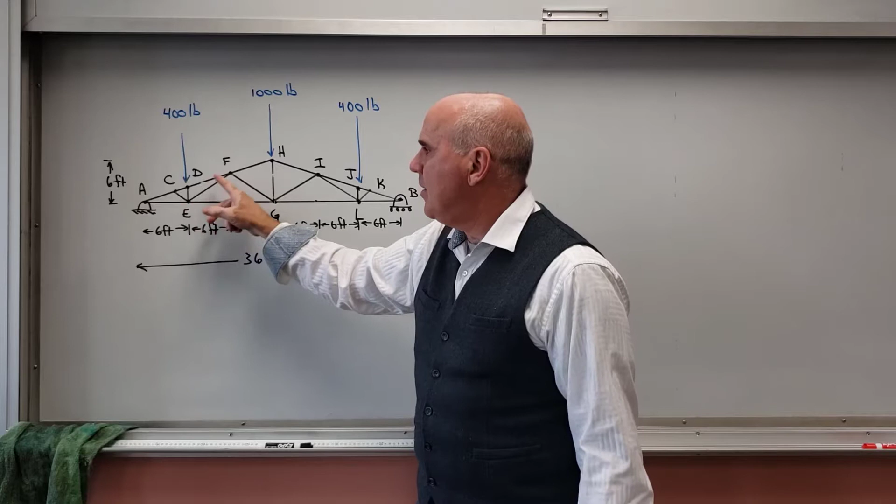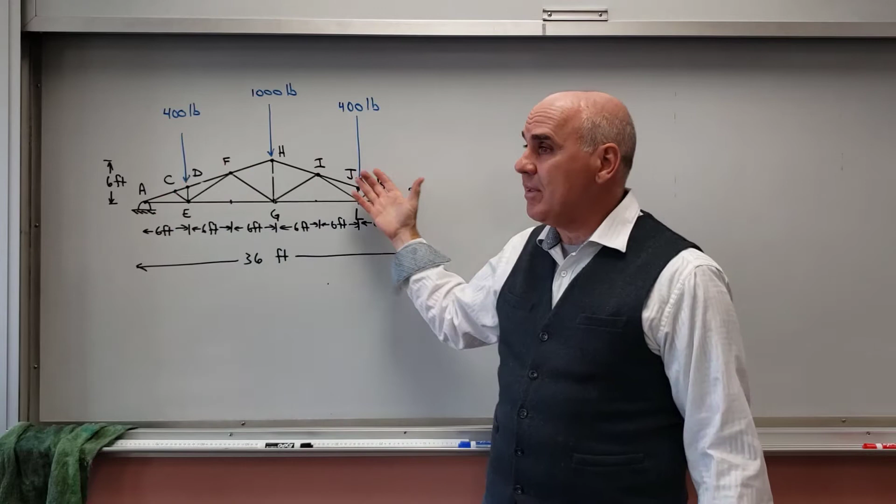The 400 pounds on both the left and right side gives me symmetry. The symmetry is great, because whatever I do over here at the left-hand side, I don't need to do on the right, because once I found it on the left-hand side, the right-hand side is identical. So whatever I find member TEF has for a force, TIL is going to have the same exact force. Symmetry makes my life nicer. If I were to load this with 400 on one side and 800 on the other, I'd have to solve that all the way across, and it's a lot of equations already, so let's not make this harder than we have to at this point.

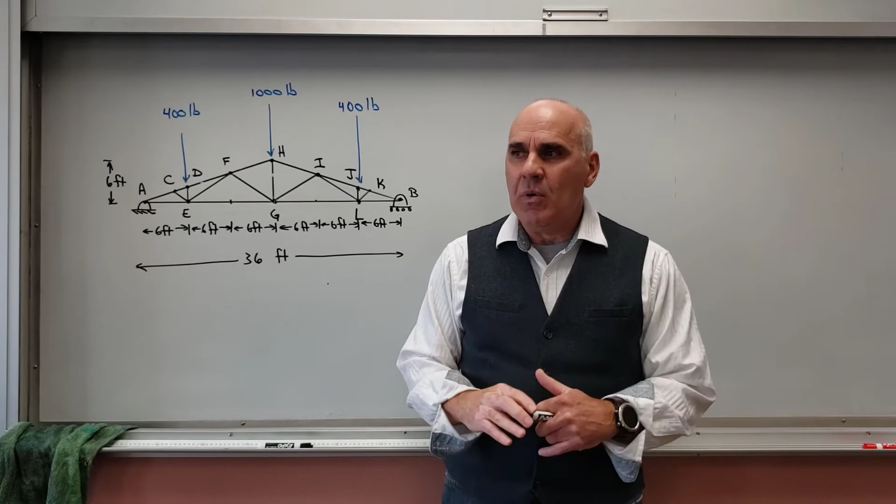All right, a couple other things for convention. Whenever I look at a member like AC, I'm going to go alphabetical, so TAC is the tension in member AC. Almost invariably I'm going to have the members under tension, but they're not all going to be under tension, and we're going to see that with the very first equation set we look at. What that does is I don't have to think about it, I just make them under tension. The mathematics will give me a numerical value that's negative, which tells me they're not under tension, they're under compression. But I don't want to have to think about that, so I'm going to do it in that fashion.

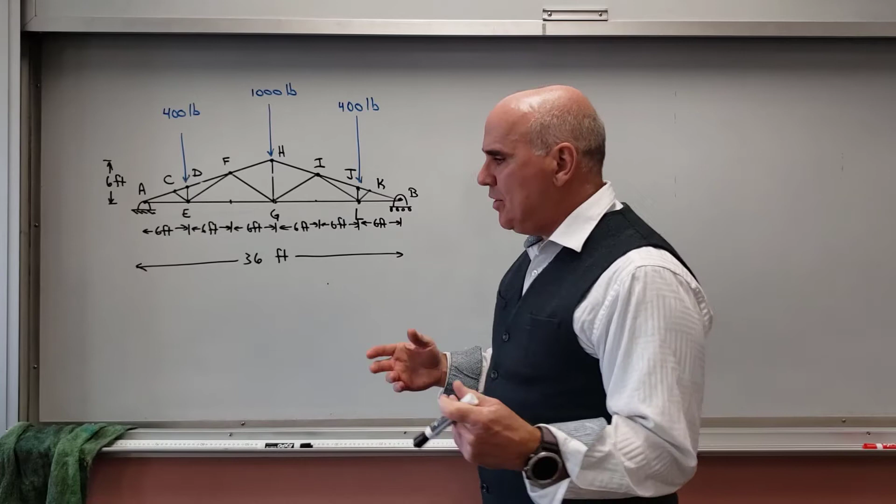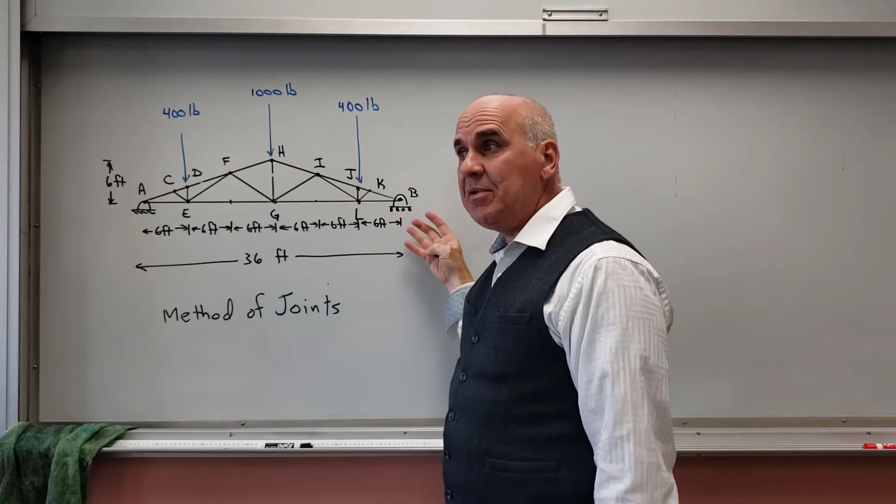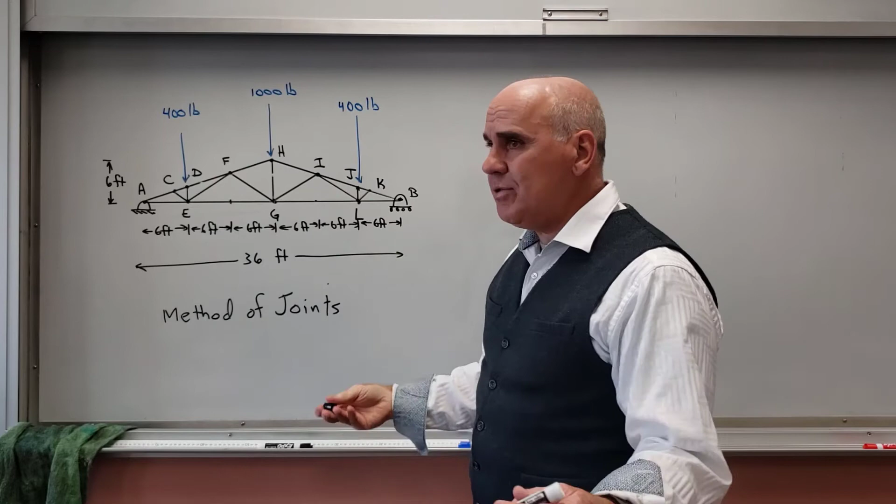All right, so we're going to use what's called the method of joints. The method of joints basically says look at each of the joints on the truss: A, C, D, F, H, G, E. I don't need to go any farther than that, again because of symmetry, the left-hand side will be the same as the right-hand side, so that'll be taken care of. Now, first things first: if I have these forces by some sort of a weight on top, or something's pushing down on top, we'll assume it's a weight of some type, then I also have to look at the support.

So this truss is over, let's say a building, and there's a support here at A and a support here at B. I've put a pin support over here at A, and I've put a roller support over here at B, just to kind of make life simple.

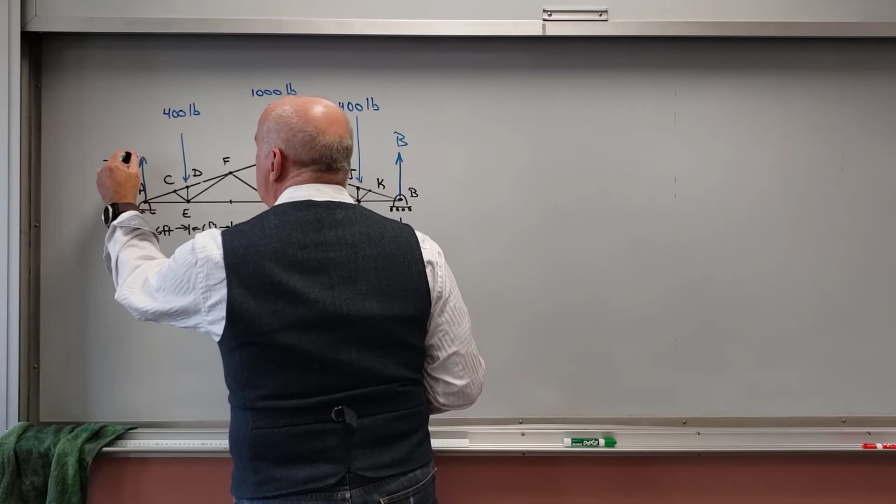So if I look at the truss externally, at the external forces, there's a force here at B, and A has a Y component and an X component. But we can see from this diagram, in this specific situation, there are no other X forces. And so A sub X is going to equal 0.

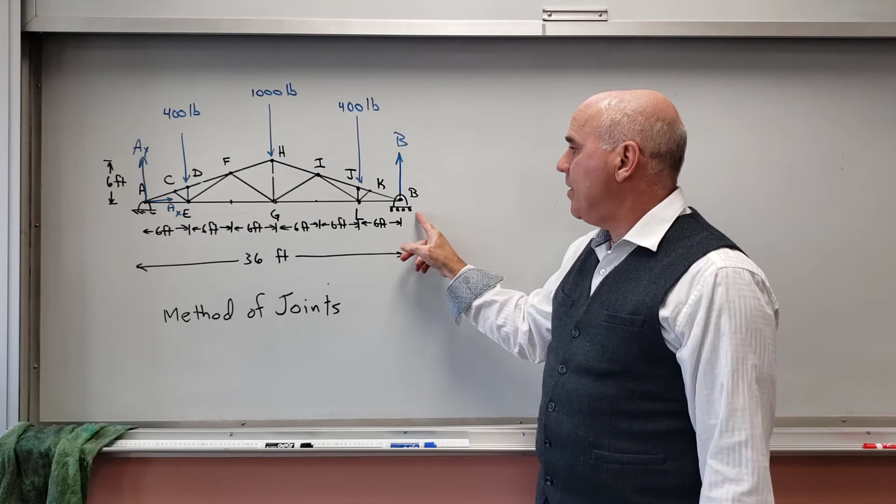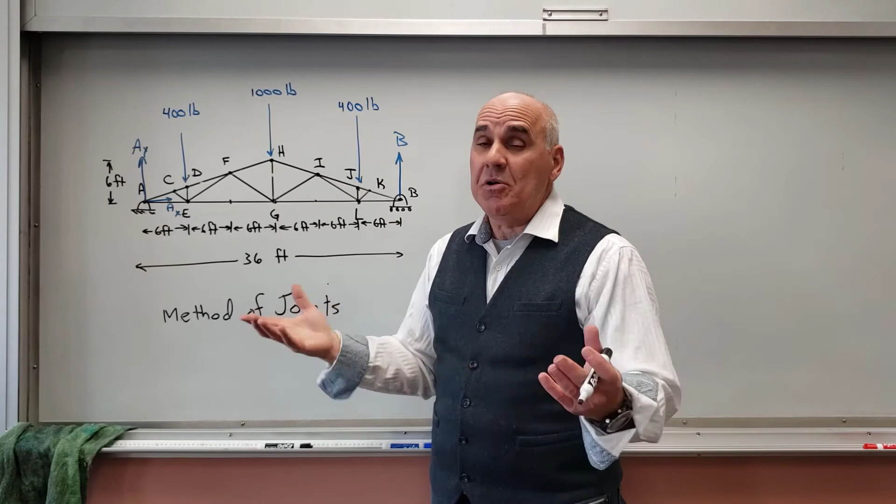Could I put a pin there or over here? Yeah, then I'd have an A sub X and a B sub X, and there'd be no way for me to determine what those are. But it's easier just to put a roller here. In fact, they'd both be 0 because there are no forces except up and down, right? So anyway, let's leave that alone.

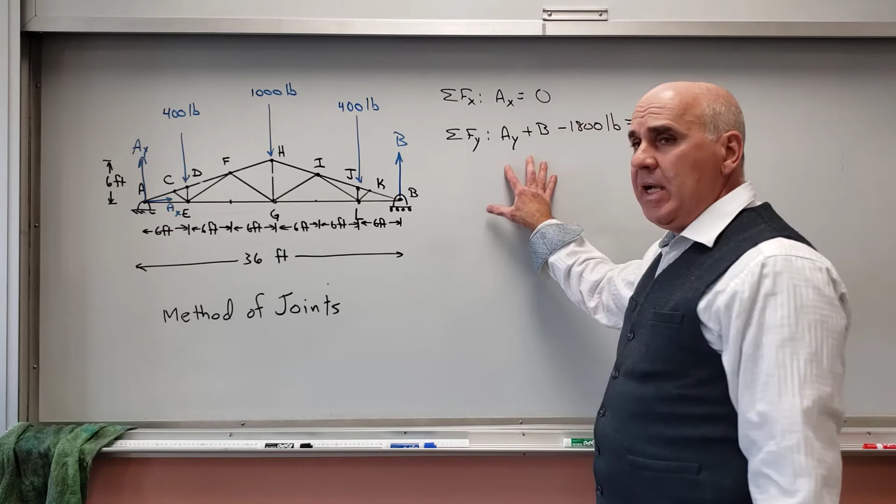So when I do the sum of the forces in the X, I get A sub X equals 0. And then the sum of the forces in the Y, I'm going to get A sub Y plus B minus 1,800 pounds equals 0, right? So A sub Y and B are unknown.

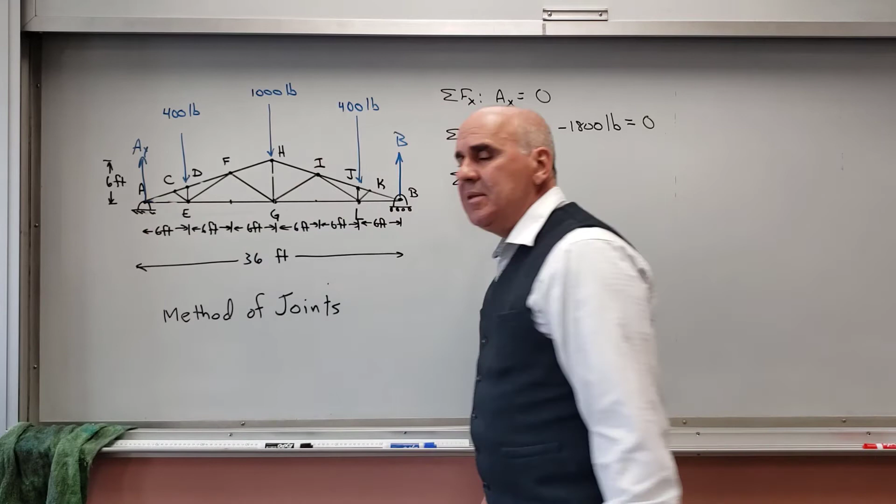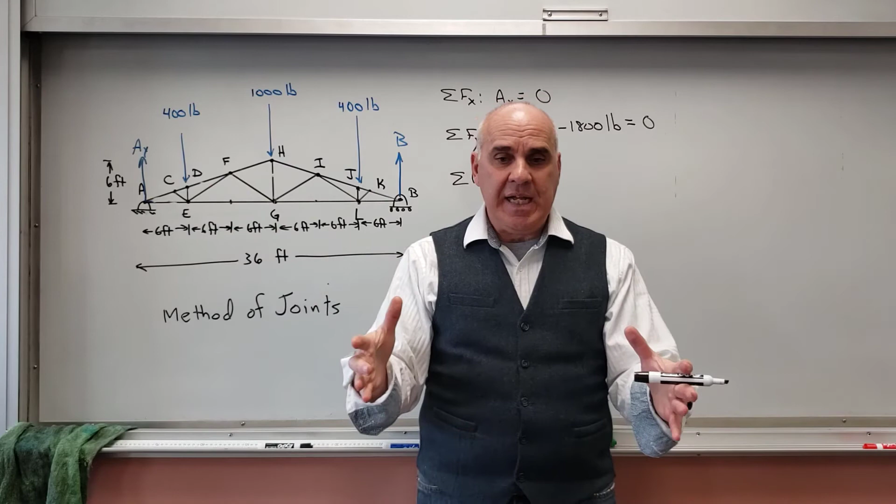Okay, so I need the sum of the moments, and I'm going to take the sum of the moments about A. In fact, let me get rid of the A sub X right now. And if we think about this already in terms of symmetry, it's pretty clear what's going to happen here. If I've got 1,000 in the middle, 400 on either side, so 1,800 down, these two on the sides, because of symmetry, should be 900. But let's do the moment equation just to make sure.

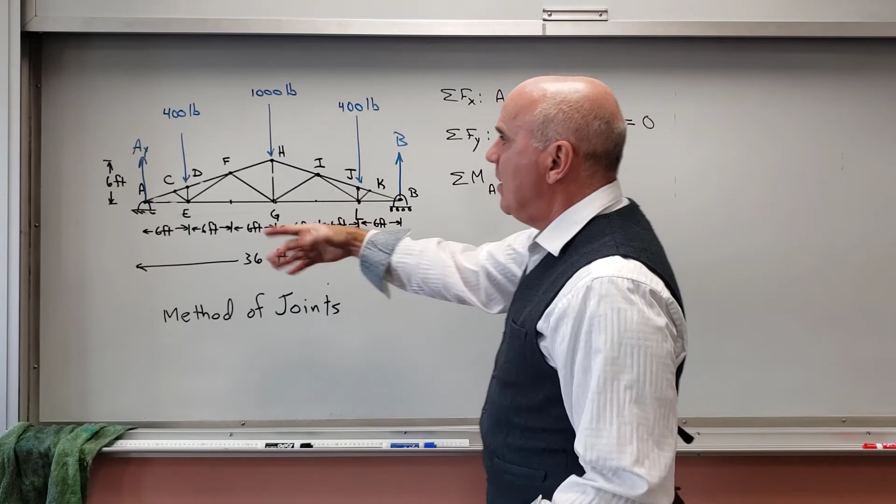All right, so the sum of the moments about A, of course, A sub Y does not supply a moment. I'm just going to call that A now. It doesn't apply a moment at A. And so what am I going to get? I'm going to get 400 pounds times 6 feet, right? Because it's 6 feet from here to here. And that's negative, right? That's going to be, if I hold the hinge at A, 400 pounds is going to try to rotate it in the clockwise direction.

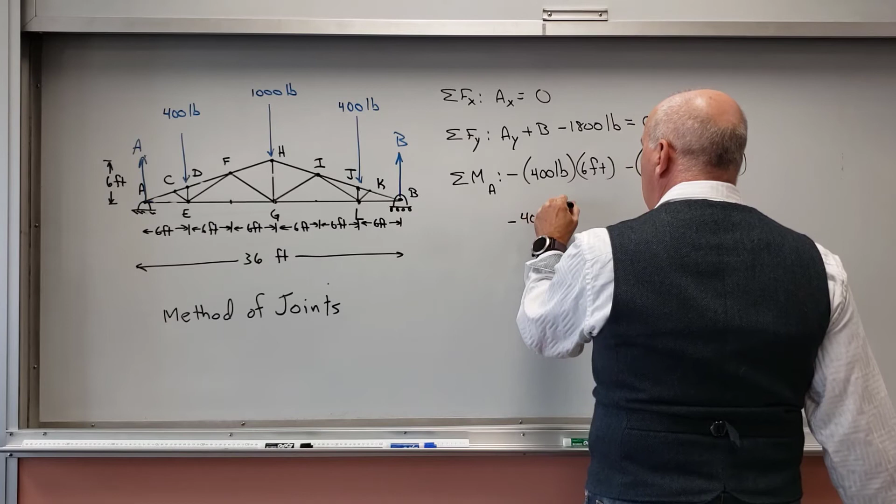Also negative moment, also negative moment. So minus 1,000 pounds times 18 feet, minus 400 pounds... let's see... minus 400 pounds times 30 feet, plus B times 36 feet. And all of that's going to equal 0.

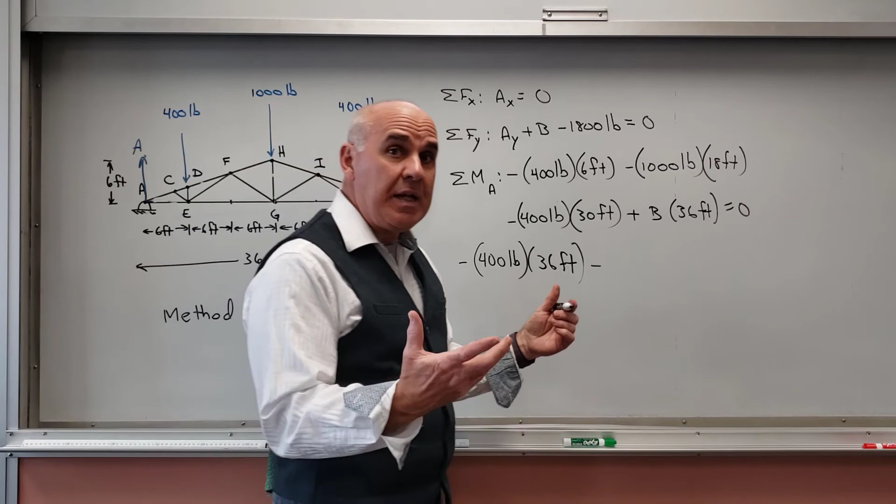Okay, so in the downward direction, here's 400 pounds times 30, 400 pounds times 6. So that's 400 pounds times 36. Right, so minus 400 pounds times 36 feet. I could use my calculator, I don't want to at this point. Minus 1,000 pounds times 18 feet. But 1,000 pounds times 18 feet is going to be 2,000 pounds times, it's going to be 500 pounds times 36 feet. Same thing, right? So this is 500 pounds times 36 feet.

And I'm going to take the B times 36 feet and bring it to the other side of the equation. And you can see there's a 36 going to drop out of everything. That's why I did it that way. These all become positive, or I can put a negative sign out in front of the B. It doesn't matter, they'll cancel. And I get 400 plus 500 because the 36 will all go away.

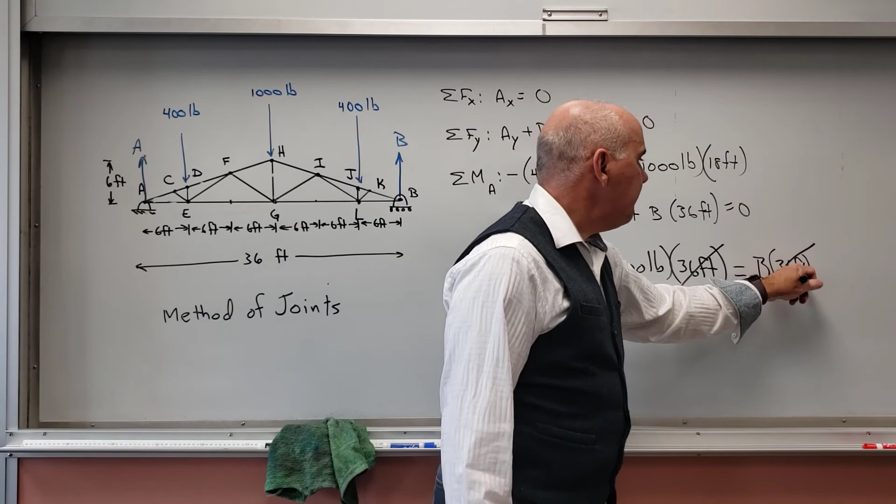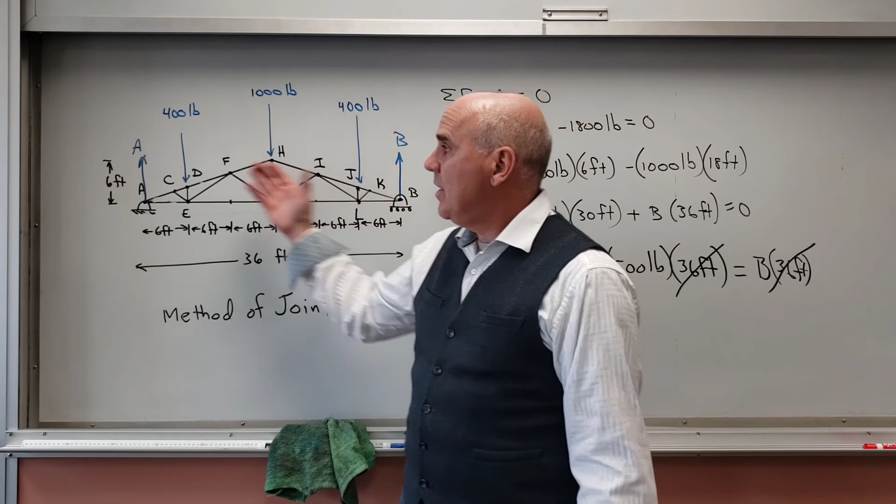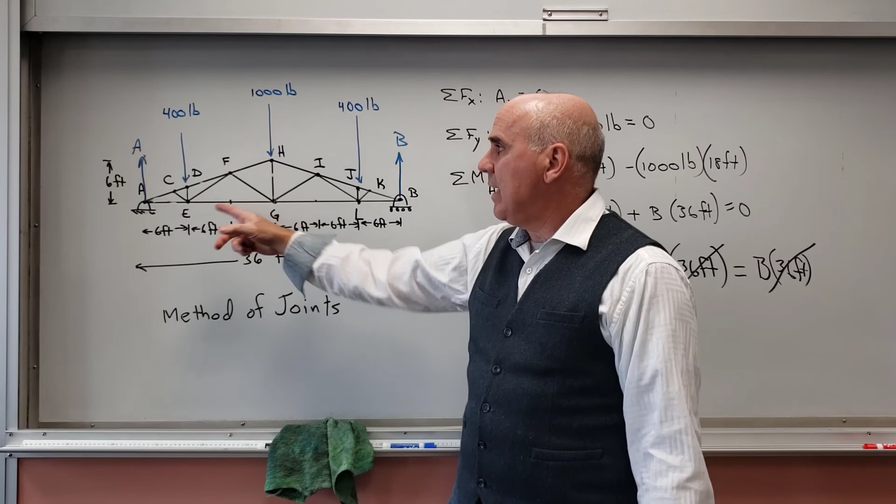Right, that should be B. And that tells me that B is equal to 900 pounds, which of course the symmetry arguments gave me the same thing, right? So B is 900 pounds, that means A is 900 pounds. All right, so there are the forces acting on the truss as a whole. All right, so that's all I've done so far. Nice free body diagram, and then the forces on the entire system, and I've solved for the external forces at A and B.